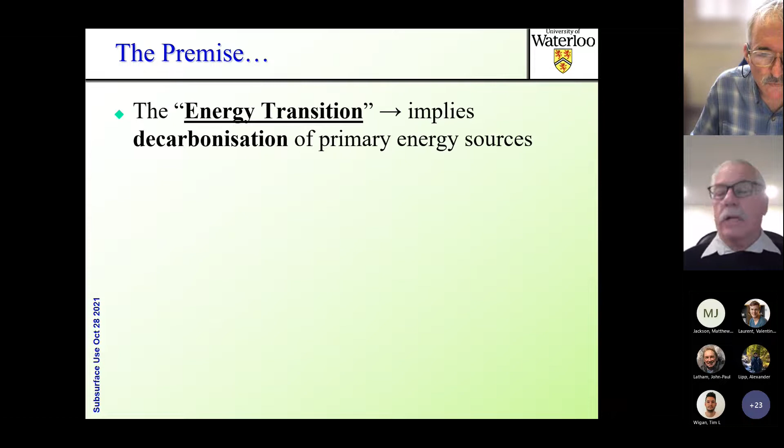In other words, replacing fossil fuels. In other words, not putting new carbon into the atmosphere. And that implies a lot of things, amongst them different transportation fuels, displacement of coal and oil with other things. I list wind and solar and geothermal here. Improvements in efficiency and storage. Certainly here in Canada, with cheap energy, we are energy pigs, and we have a long way to go to make our buildings and our built infrastructure more efficient, maybe even retrofitting our infrastructure to consume less energy in many ways. So I'm going to talk about the subsurface as an aid to the energy transition.

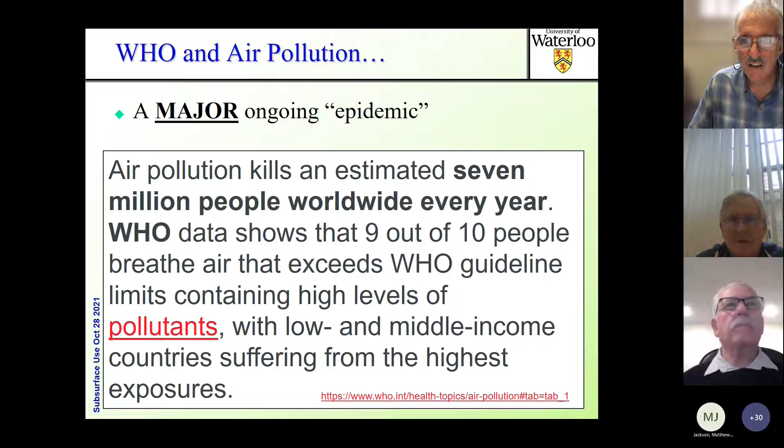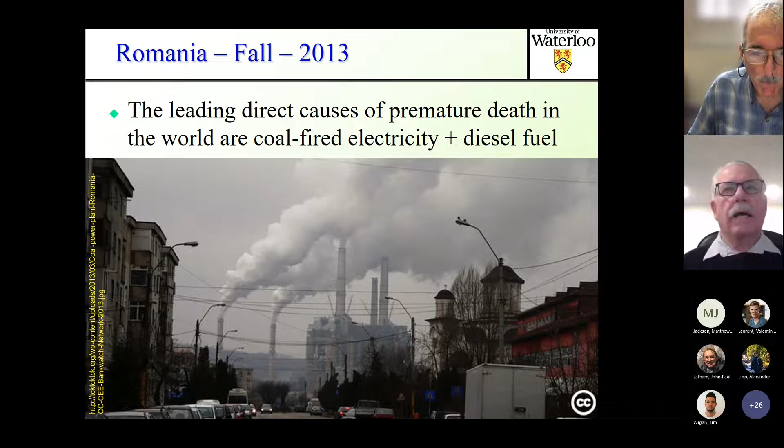And once again, I remind you that it's partially a quality of life issue in many parts of the world. Not so much here in Canada. We're in fairly good shape, but along the east coast of China and India and Mexico City here, these are issues. So the World Health Organization is very clear about this. They have said that air pollution kills an estimated 7 million people because of the pollutants. And of course, naturally, low and middle income countries suffer the worst. Romania, now part of the European Union, has a long history of extreme pollution for their 2-3 major cities, and they're working hard right now to try to abate that level of pollution in their cities.

Okay, so the subsurface and energy transition, I'll try to outline some somewhat different ideas, but in general, we can use the subsurface for natural gas storage. And I remind you that natural gas is a very clean fuel. And many of us, myself included, believe that natural gas could serve as a transition fuel, using natural gas for one generation to build the infrastructure as we move towards a hydrogen economy. Because if we just say no natural gas, when it comes to putting into place a hydrogen economy, then we're just going to have to spend a few trillion extra dollars at that time.

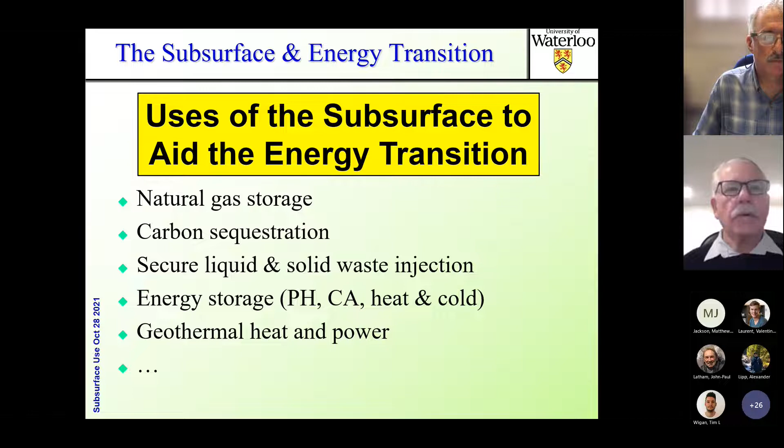Carbon sequestration, secure liquid and solid waste injection, energy storage with pumped hydro, compressed air, storing heat, and also in certain climates, storing cold. And yes, I know in Canada it's a bit bizarre, but I'm actually looking at a technology to store cold in the subsurface for warm climates, evidently. Geothermal heat and power, and other issues. So when we think of the subsurface and energy, we kind of normally think of something like this. This is an array of natural gas wells in Texas.

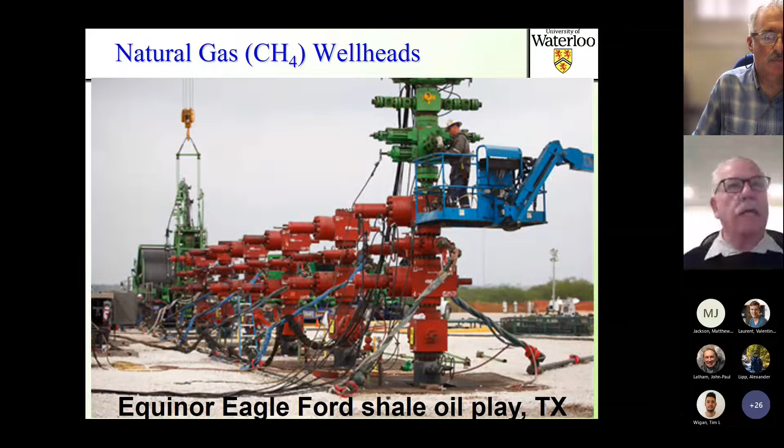Yeah, that's big steel. But we can also use big steel for sequestration and for other purposes to access the subsurface. In general, we're using well bores, not exclusively, but in general.

So I'm going to talk about narrower topics, things that I've been involved in, and one of them is subsurface biosolids injection. And the nice thing about that is that it is a safe and economical treatment method compared to the complex civil engineering treatment facilities that you use in Great Britain and in other places that are economically well developed.

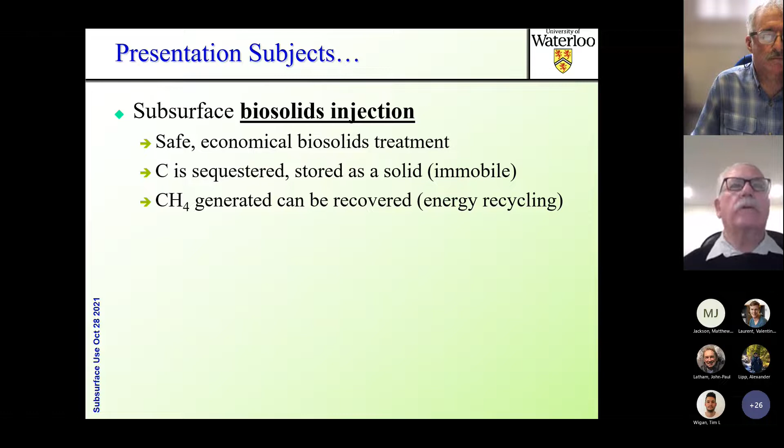The nice thing about putting biosolids in is that you sequester the carbon, the excess carbon, and it also generates methane by the methanogenic archaebacteria that are in the ground everywhere that will degrade the carbohydrates into methane and other gases, leaving behind the carbon as solid material. We're all geoscientists. We know that this is simply the process to make coal. So we can sequester huge amounts of carbon in this manner.

We'll look at enhanced geothermal systems and sedimentary heat. We won't look at high-grade geothermal at all. And I'll finish up by looking at energy storage methods, something that I spent a lot of time on recently, compressed air storage in particular, but also looking at heat storage.

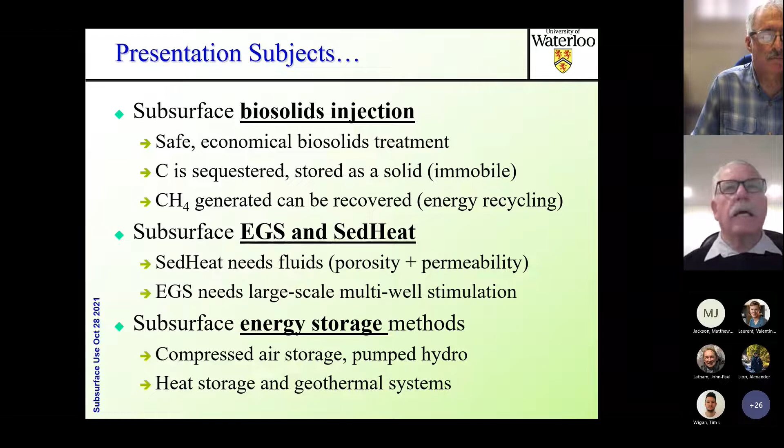Biosolids injection. Essentially, we're looking at the injection of a slurry of wastewater and biosolids. And of course, you and I and everybody produce on average about a half kilogram of dry biosolids every day, which is dominantly organic molecules that have to be treated.

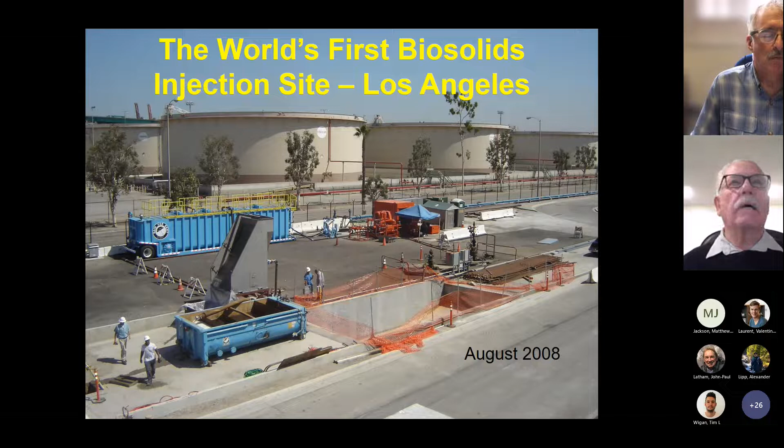So this is the world's first injection facility for biosolids. I was involved in this. I have a patent on this, which expires next year, by the way. And essentially, we are going to slurry some biosolids with wastewater, inject it, anaerobic decomposition takes place. Methane is generated at about 12 to 15% of the dry mass.

There's a wide range depending upon the composition of the biosolids. Carbon dioxide, which is extremely soluble in water, is another byproduct, and the carbon dioxide will enter into solution in the formation water. And that leaves carbon to be permanently sequestered, and a lot of it. At depth, the environmental risks are extremely small. You're not going to have the solid carbon escaping ever.

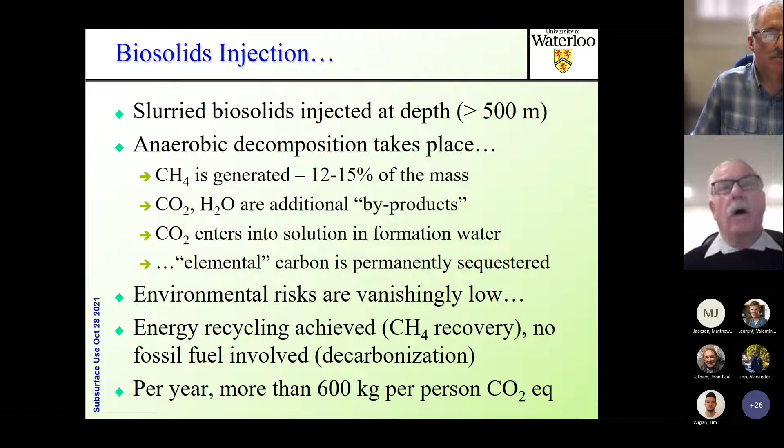And we have some energy recycling. The methane can be recovered. So calculating it out per year, it's more than 600 kilograms per person, carbon dioxide equivalent. Multiply that by large population centers, and you can see that this is not small and it's continual. In other words, we're always sequestering solid carbon permanently.

Conceptually, we have a treatment facility at the surface that accepts the biosolids and slurries it. Injection under hydraulic fracturing conditions, that's necessary. We can't put solid material into the earth without hydraulic fracturing, but we know how to do that. And then, of course, at a later date, methane production.

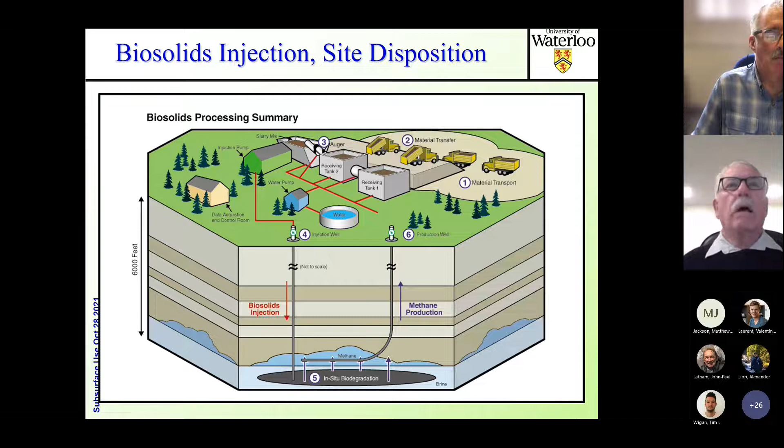We want to be in a place where we have low permeability strata above us for security, good lateral permeability for the leak off of pressures. In other words, high permeability zones above you are good. That causes a leak off, which gives you more security, and a secure wellbore with injection tubing, instrumentation, etc.

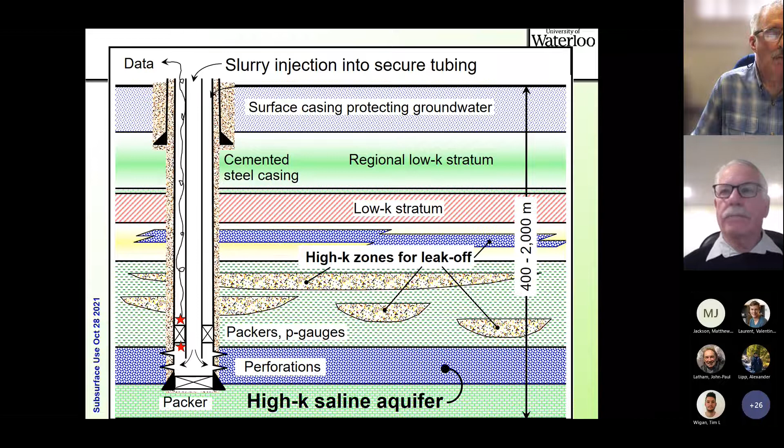In the TIRE project in Los Angeles, the digested sludge is injected into an old oil field at a depth of about 5,000 feet, but a saline aquifer will be just fine. All dangerous agents and human biosolids have a very high concentration of metals. And of course, there's chemicals that you flush down the sink, and there's viruses, and there's other active agents in this biosolids, and these are permanently sequestered safely.

In other words, we get rid of them, and the subsurface will treat them over time. Organic materials will be decomposed by the bacteria, chemicals will be adsorbed by the clay minerals, metals will be sequestered by chemical processes as well. And of course, the carbon sequestration is in solid form, which means it's fully secure, plus methane. And of course, you can co-inject other waste.

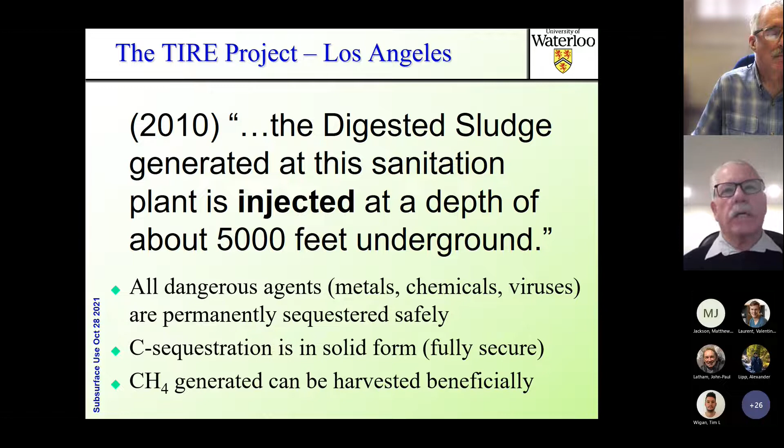And I just show you an example of tank bottom sludges from the oil industry. This is a shot in Saskatchewan, and you can see this sludge is about 30% oil, 20% silica type minerals, and 50% water, and it's extremely expensive to treat. Well, it can be disposed of at depth.

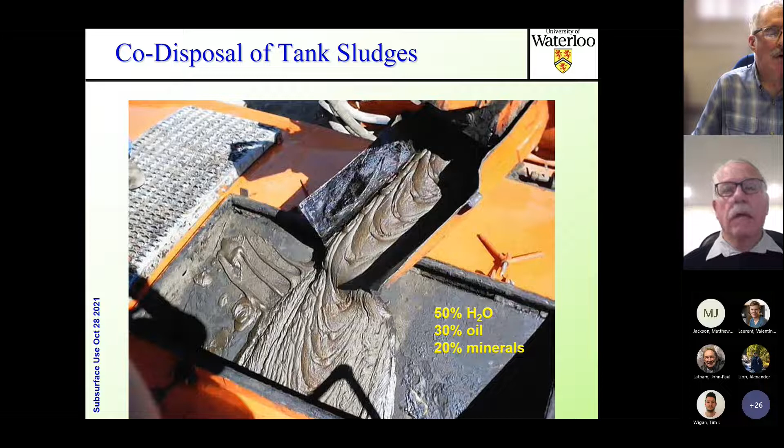To give you an idea of an oil field injection operation, this is one of the larger ones in the world in Indonesia, currently inactive, and sludge is collected from all kinds of facilities, brought to this central facility, slurried and injected.

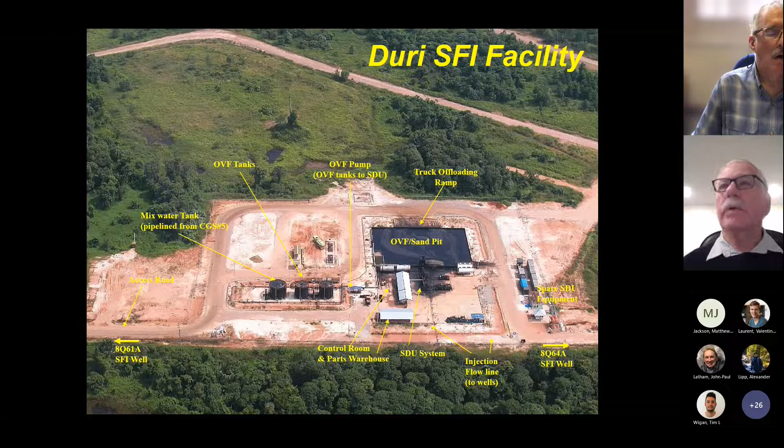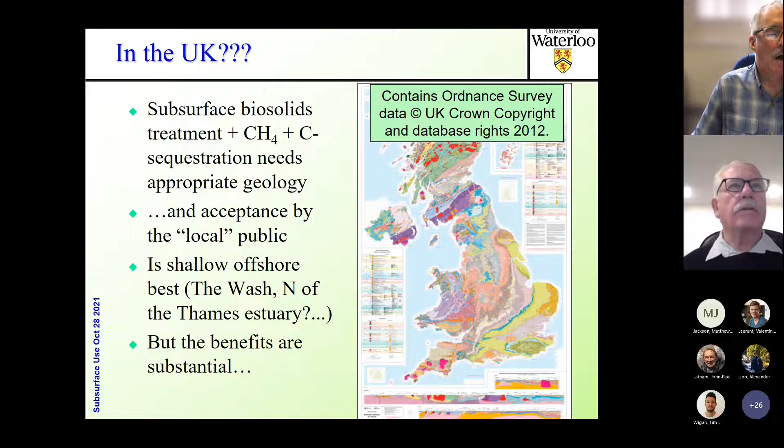In the UK, you have to look at the geology. You have to look at and get the right geology. And just looking at the geology of the UK, the geology in the estuary of the Thames and in the Wash, maybe shallow offshore, seems to be very good, very ductile sediments and appropriate saline aquifers at a moderate depth, 500 to 1,500 meters. Ideal situations for biosolids injection.

There are geomechanics issues to manage. The injection is under conditions of hydraulic parting. Pore pressures in the target formations must dissipate rapidly to avoid regional pressurization. And we have some limits perhaps for a single well, maybe on the order of 50,000, 100,000, 200,000 cubic meters on a solids basis. That's maybe the limit for a single vertical well.

And there will be stress changes. And that means that the initial in situ stresses are going to be altered quite massively. We will be increasing the lateral stresses a great deal. And that's going to change our fracturing behavior. And we want to understand these changes in order to give us a better idea of containment. We want to understand the potential for causing the shearing of bedding planes, especially smectitic clay, weaker bedding planes, which can cause wellbore damage and impair our process.

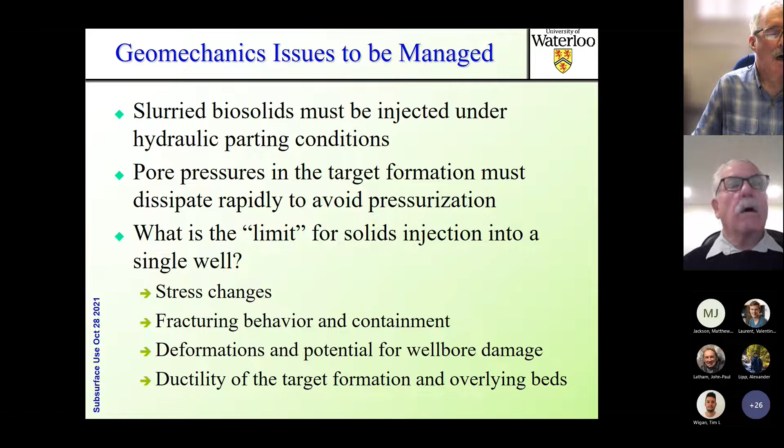We want to look at the ductility of the target formation and the overlying beds to make sure that we are sequestering these materials. But I do point out that after about 18 months to 5 years in situ, the toxic agents have been either digested by the bacteria or have been adsorbed onto clay minerals and are no longer mobile.

The next issue that I've been working on is low-grade geothermal energy, power and heat from the earth, and many of us have been working on that. And I just want to remind you that Canada is cold. So this is a map compiled by Steve Grasby of the Geological Survey of Canada from limited data that is available. But that great big white central part, that's the Canadian Shield, it has a low geothermal gradient. It is one of the poorest places in the world to try to go down and mine heat.

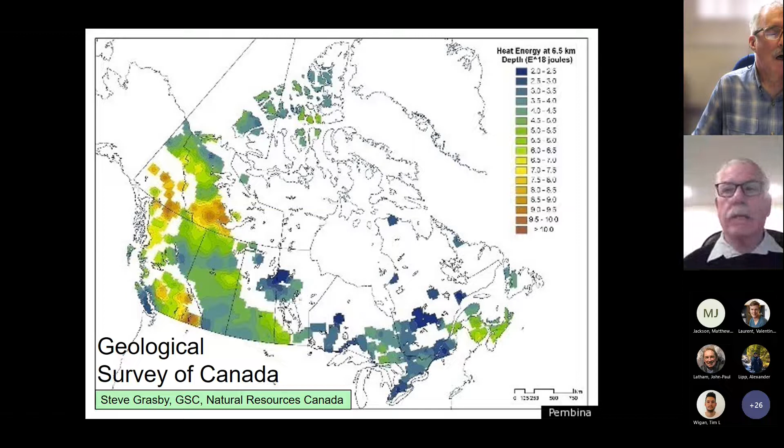On the other hand, we have just a few areas in British Columbia on the far left and maybe into the Yukon that could give us high grade steam, dry steam or wet steam, but we haven't found any reservoirs yet. And then in Alberta and Saskatchewan and on up into the Northwest Territories, we see a sedimentary basin, the Western Canada Sedimentary Basin, which has warm fluids at depth. And by warm, I mean for good saline aquifers, you're going to be in the 110 to maybe 120 degrees Celsius range. So Canada is not only cold at the surface, it's also cold in the subsurface.

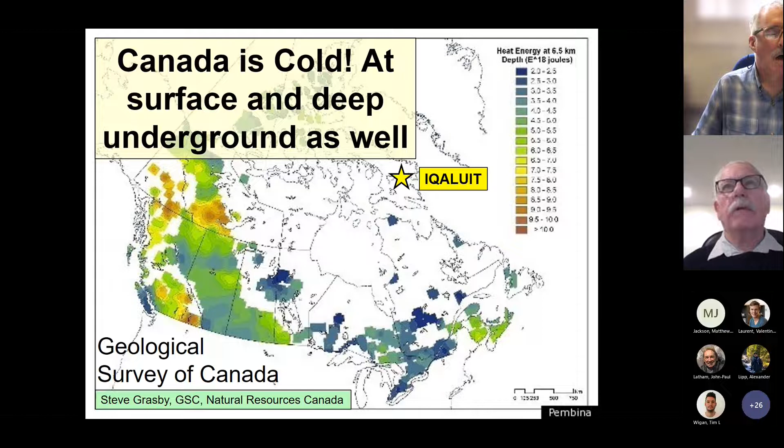And to show you that it's cold in the surface, let's look at this capital city of Nunavut, Iqaluit, just to give you an idea of the climatic conditions. Yes, that's right. A hot day in July is 8 degrees Celsius. Iqaluit makes London look definitely tropical. So that means that we have massive heat requirements in the north and no requirements for air conditioning or cooling. That means that we have some constraints on the use of ground source heat pumps as a means of heating and cooling, because we don't need cooling.

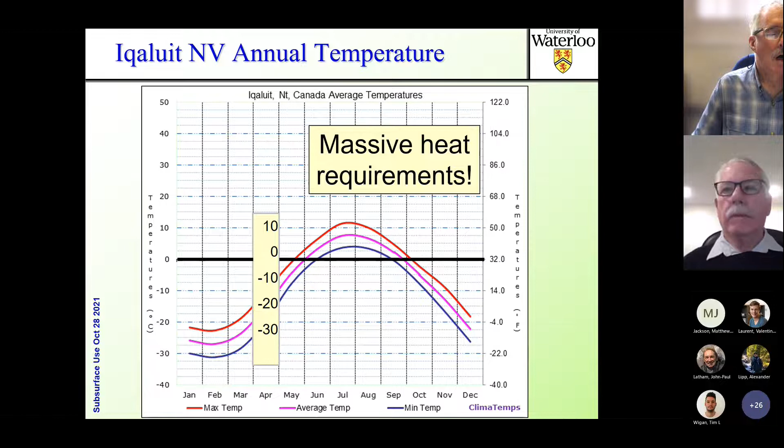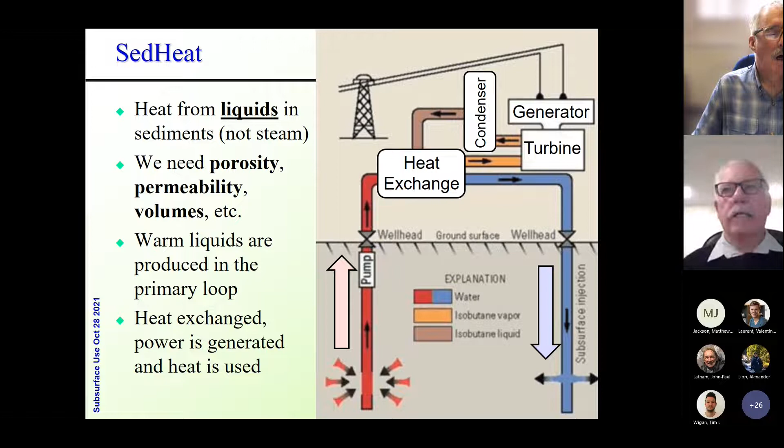And the first commercial project, the DEEP project in Saskatchewan, right on the American border, is on its way to producing commercial power in January. All of the holes have been drilled, and the surface facilities are being built and finalized as we speak. They have already received permission to increase their project from 5 megawatts to 20 megawatts right away, and they are looking at the prospects for other power generation plants in the subsurface.

Now you notice I'm saying power, electrical energy. Why electrical energy and why not heat? Well, heat cannot be shipped 500 kilometers.

So electrical energy is very, very dispatchable, very shippable, very good to send out to remote areas that need it, whereas heat has to be used locally. Even though we want to mine the heat and use it for domiciles in Canada, that's a local issue.

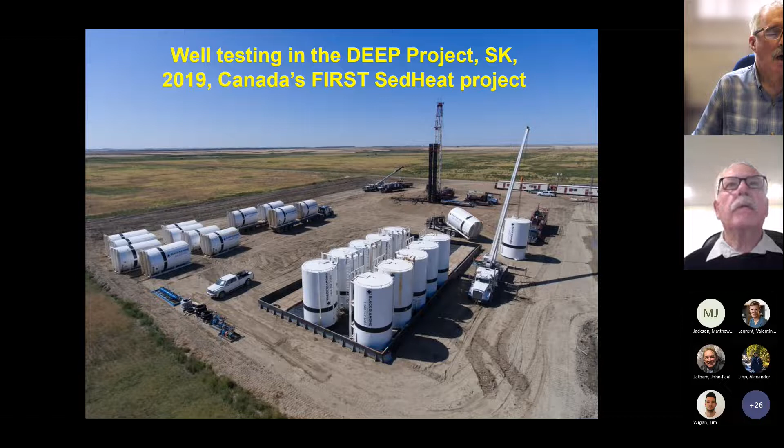This project is 3.2 kilometers deep, about 115 degrees Celsius. And to give you an idea of the requirements, to generate 5 megawatts continuous power requires about 210 liters per second of 115 degrees Celsius brine. Furthermore, the brine that comes out is not at ambient, it's at 65 degrees Celsius. So there's still a lot of sensible heat that could be extracted from that fluid.

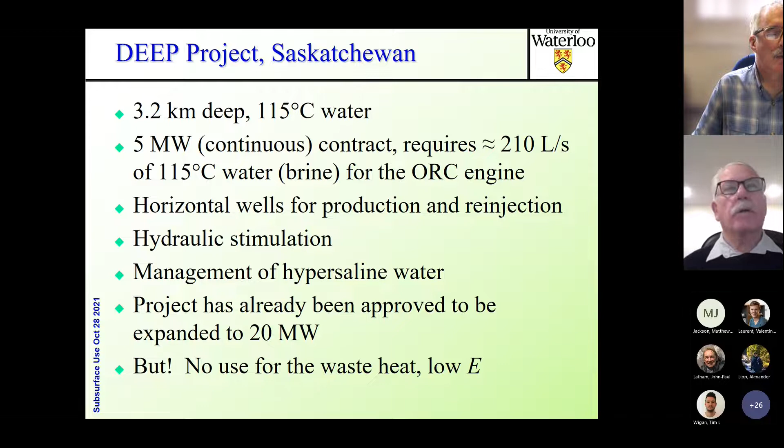But you saw the picture, that's out there in the prairies. There is no use for the heat at the present time. That's unfortunate. That means that the warm water is just going to be recirculated and there will be attendant losses.

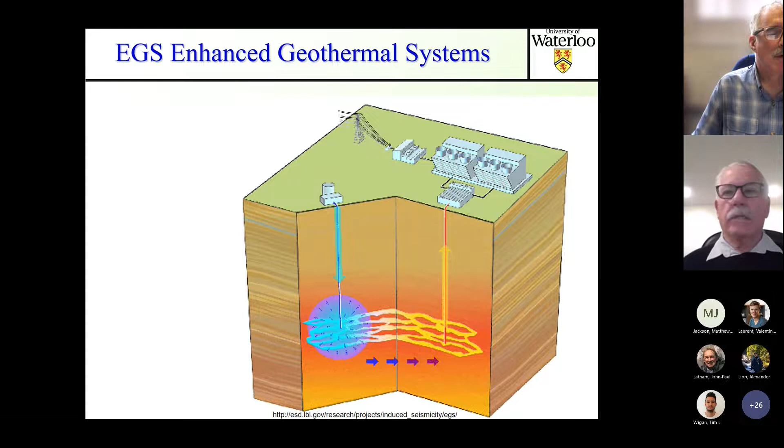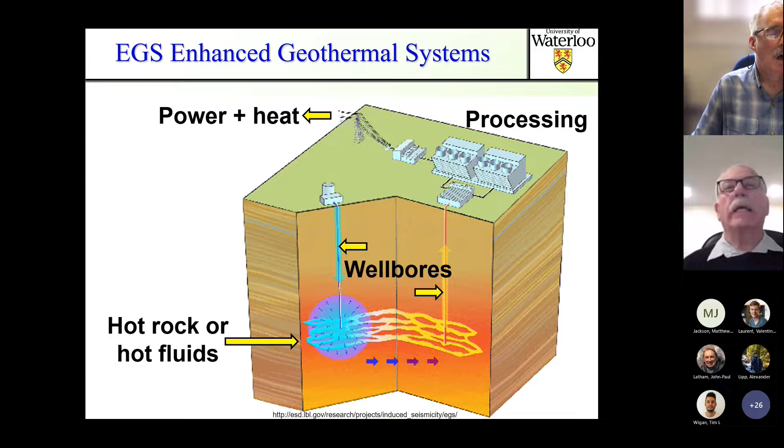Now, if we don't have permeability and porosity, the idea for an enhanced geothermal system is to identify a zone of hot rocks or hot fluids or warm rocks, access that zone with well bores, bring the heat up to a processing plant, and use the power and heat as best you can. In general, we believe that these systems are not sufficiently permeable at the beginning and will have to be hydraulically stimulated to generate the interwell connectivity required to successfully mine the heat at a commercial level.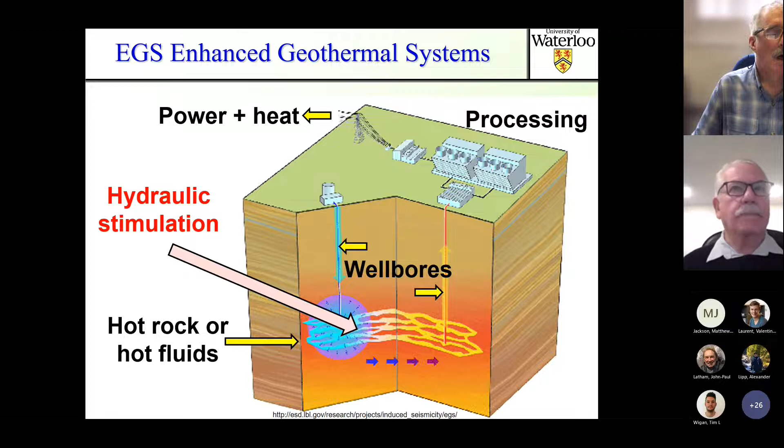Probably at least 100 degrees Celsius rock is going to be needed, preferably more, of course, but more means deeper, deeper means drilling expenses. So we need a method to get the heat from the rock, to bring it to the surface, and to use the thermal energy effectively. And I keep on emphasizing heat. In Canada, we have need for the heat.

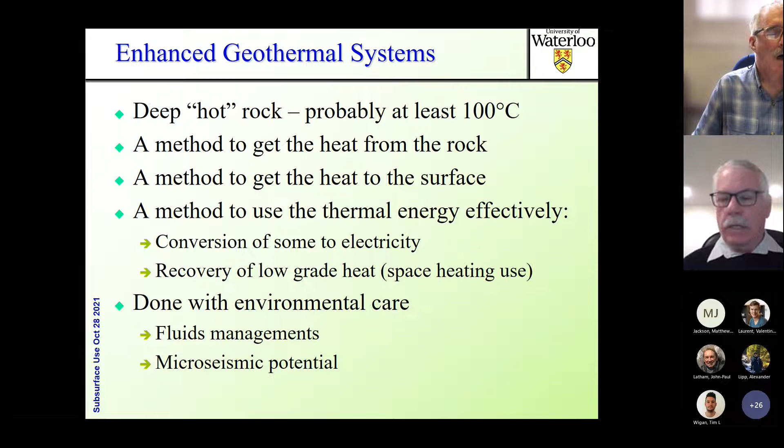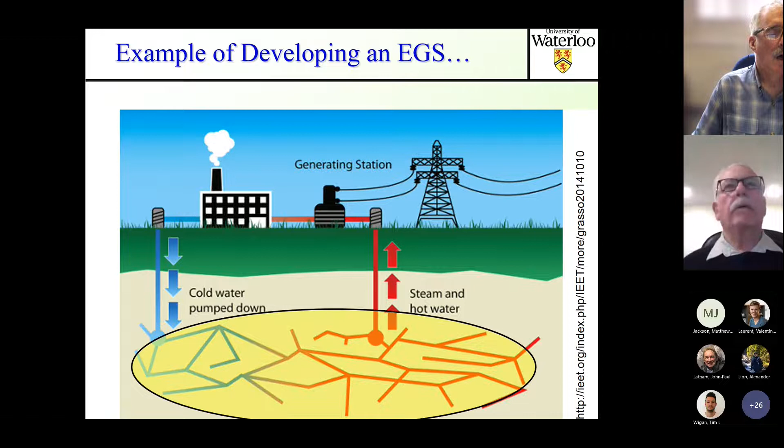The two big issues environmentally are fluids management and the potential for microseismic emissions, or shall we say small earthquakes, as a result of the thermally induced strains in the rock mass, combined with the higher pore pressures that might be used to drive the injection process. So once again, to develop it, we have to create a permeable environment. We have to circulate the fluids through this hydraulically stimulated zone and bring them to the surface.

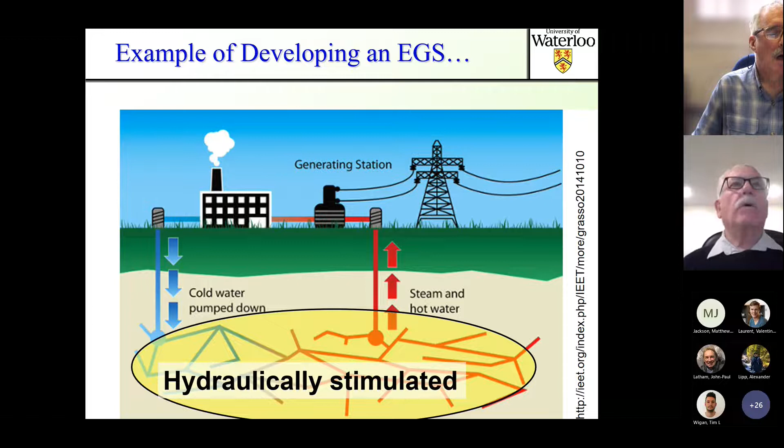So hydraulic stimulation, a primary loop. Remember that as we put in fluids into the rock mass, the fluids come back up mineralized, unless we're using carbon dioxide, something that many people are looking at. That means that we have two different isolated loops, and we have to have a heat exchanger to scavenge the heat from the primary loop to use in the organic Rankine cycle engine.

However, don't get fixed on an organic Rankine engine. We and others are developing new ideas, such as combining compressed air energy storage with geothermal heat for power, even cooling. If you give me compressed air and low-grade geothermal heat, I can generate power, but I can also give you the output air at about 2 or 3 degrees Celsius, and that would be wonderful for places like Mumbai or Nairobi to provide cool in a hot climate.

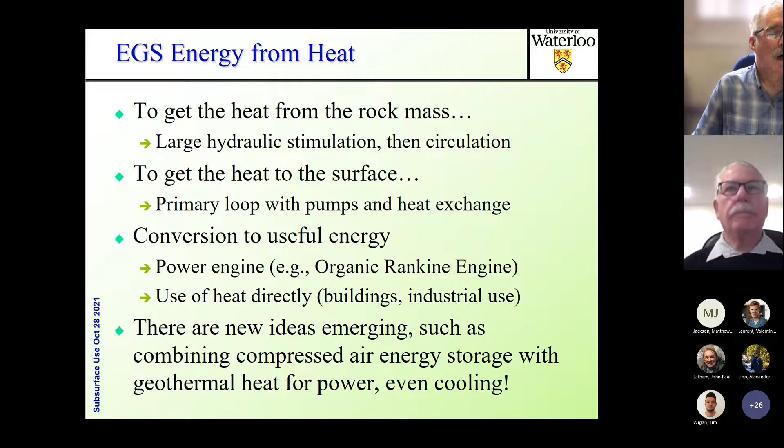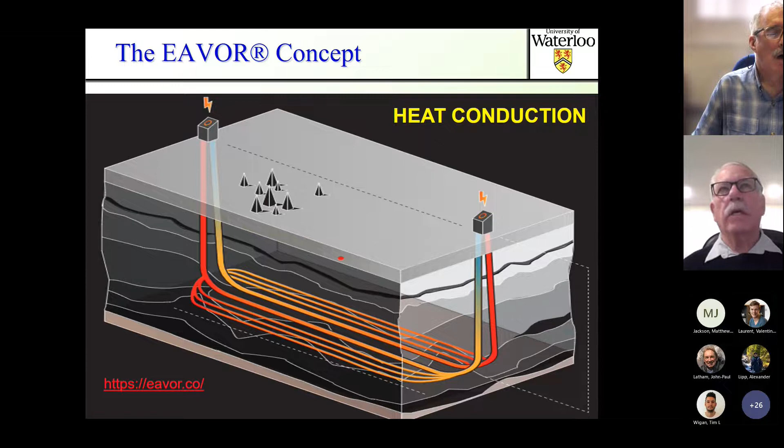Another way that is being examined is heat conduction. So this is the EAVOR concept. The website is listed there, and it's conduction in the rock mass, not convective exploitation by injecting a fluid into the rock mass. The fluid is circulated through sealed wellbores, either cased or sealed in another way. And full-scale field trials are ongoing in central Alberta.

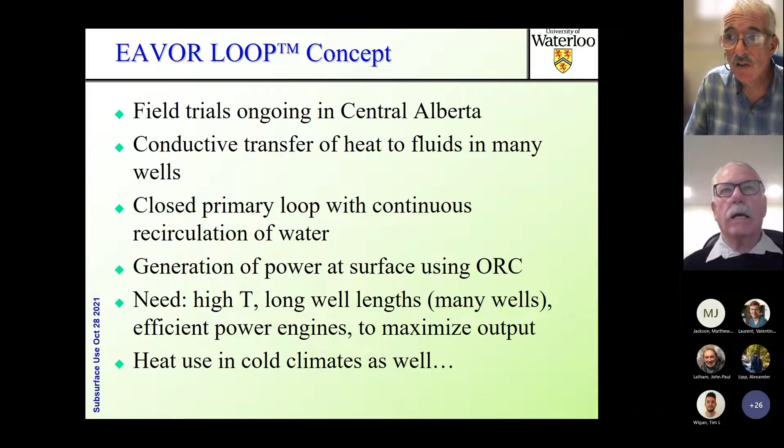And remember that conduction is slow. You're going to need a lot of wells, preferably a high temperature. You're going to need efficient power engines. And again, I want to remind you that the organic Rankine cycle is not particularly efficient. Even with the delta T that you can use, it still will only extract about 15, maybe a little bit more, % of that energy as electrical energy. There's a huge amount of waste heat in the organic Rankine cycle system. But again, my final point, in cold climates, that heat has significant value.

But we all know that drilling costs increase exponentially while the heat in the rock increases linearly. So that means there are very severe limits to the commercialization of EGS with depth. This idea of, hey, let's drill down 15 kilometers. I'd like to remind you that the deepest hole we've ever drilled in the world is somewhat over 12 kilometers, and that took many years to drill in the Kola Peninsula in Russia.

So the Finland project is looking for heat exclusively. They want to heat a subdivision exclusively, and they claim that they will be able to mine about 35 megawatts of heat at the maximum output of the system. Of course, in the summer, you're not going to be using this very much, but in the winter, in the coldest months, you need that heat. So 35 megawatts is their claim.

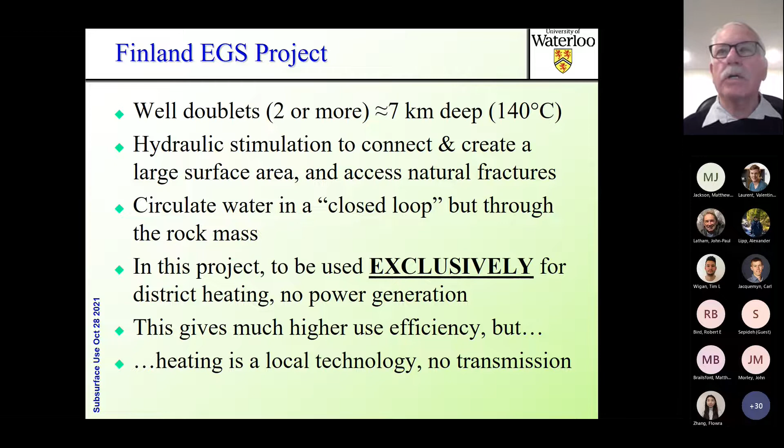Remember that if you do use geothermal for heat only, it's much more efficient than trying to generate power, but it's a local technology. No transmission is reasonably viable. I mentioned the binary cycle. I just want to emphasize that we stimulate a region, we work through a primary loop, and there's a lot of people that are looking at different technologies for this binary cycle power plant to try to extract more power from it. But we are, of course, limited by the laws of thermodynamics.

And Monsieur Carnot, who was a professor at École Polytechnique, I believe, back about 200 years ago, he kind of laid down the big lines for the efficiency. Most of you know about the Carnot cycle, which tells us how much power we can get out.

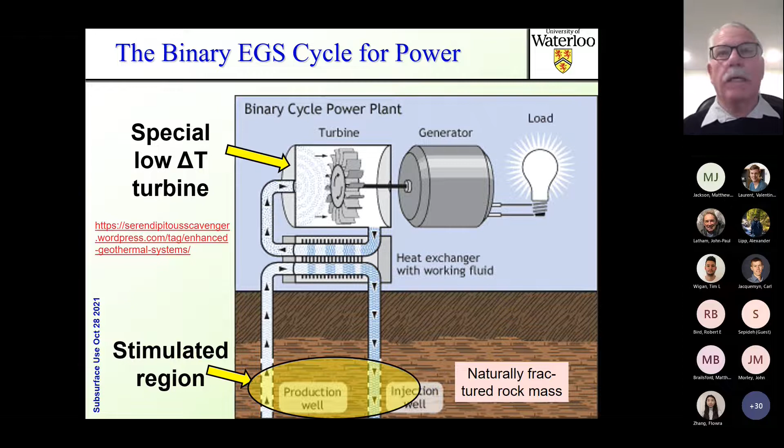Probably we can recirculate the cooled fluids through the rock mass, so we don't have to worry about disposing of fluids. But remember that as we cool the rock, we're going to have shrinkage. That's going to open up more natural fractures, and we're going to get a process called short-circuiting, thermal short-circuiting. We've published a couple of papers on that here in this last year. You can access them if you wish. The primary author is Bruce Gee, Rob Gracie, and myself.

And also generating microseismic activity, because if we're cooling a zone, we're going to be dropping the stresses in that zone. Those stresses will be transferred to the shoulders, and we're going to have very large stress gradients, which will, of course, trigger shearing of the natural fractures.

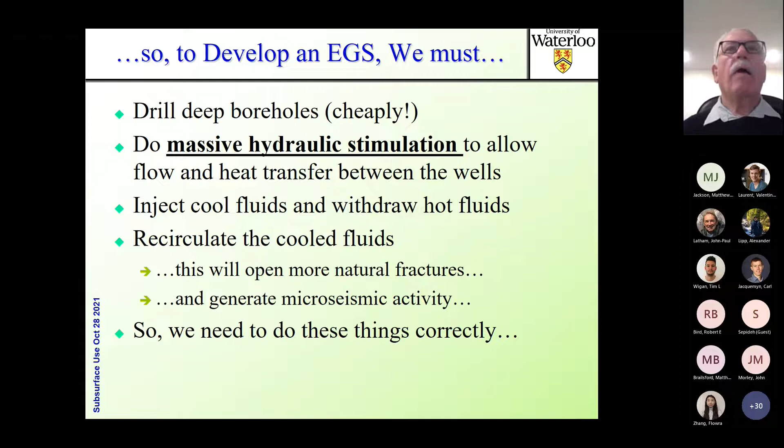And just to show you natural fractures, about 3 years ago, I had an opportunity to go down to Tasmania. I recommend it to each of you, and have a look at some natural fractures along the beach there with a friend of mine who's also a geotechnical person. Yep. Now down below, they don't quite look like that.

But one thing that we do know is that we're going to get channeling or short-circuiting because of a process of shrinkage and focusing of the flow in certain regions. So that one fracture will become the primary pathway, and then that means we have more difficulty in mining heat from surrounding zones.

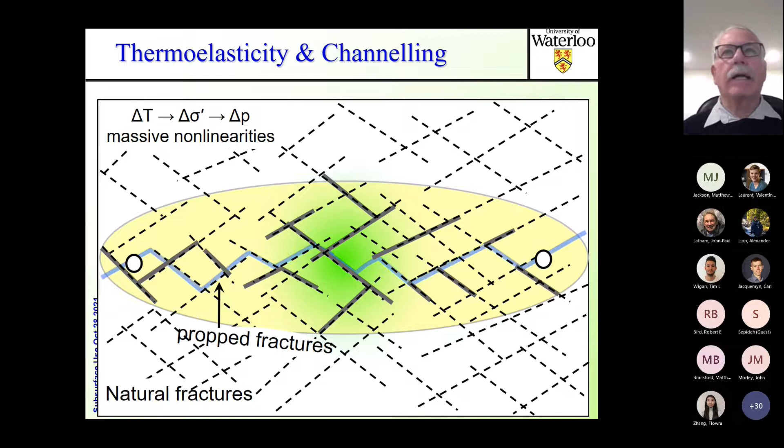Okay, now this is a very, very non-linear process, and that makes the mathematical modelers maybe happy, but also challenged. So when we write down the governing equations and start looking at the parameters, what some people call constants, we start to realize that in geothermal, nothing is constant. Our moduli are changing, at least at the scale of the rock mass. We're changing the permeabilities. Well, I don't think we're changing beta so much. That's the coefficient of thermal expansion, but still, things are changing all the way. We're even changing porosity by the dilation of the apertures in natural rock masses.

So everything is nonlinear, even the viscosity. If we're using water, at the beginning, we're going to have high temperatures. At the end, we're going to have much lower temperatures during our heat mining. The viscosity will change by a factor of 2 or 3. That will change our parasitic losses.

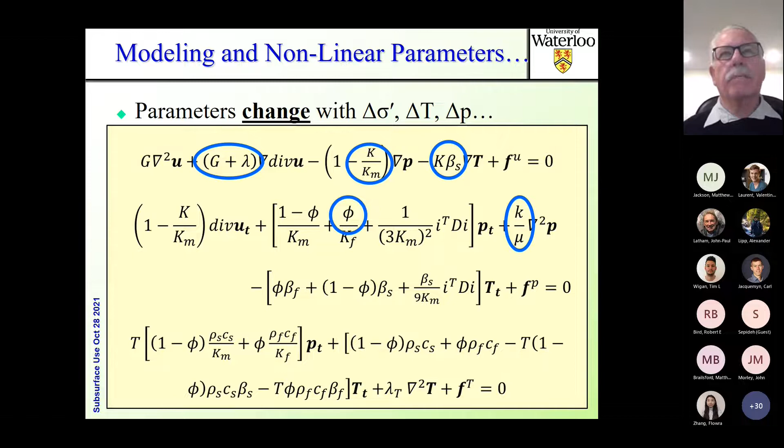Okay, so we need better predictive models because people that invest money into geothermal projects don't like uncertainty. For steam projects, we know how to de-risk them financially. But for enhanced geothermal systems, we're not there yet. We need better models to allow better predictions. We need improvements in hydraulic stimulation to link well bores that might be 400 or 500 meters apart.

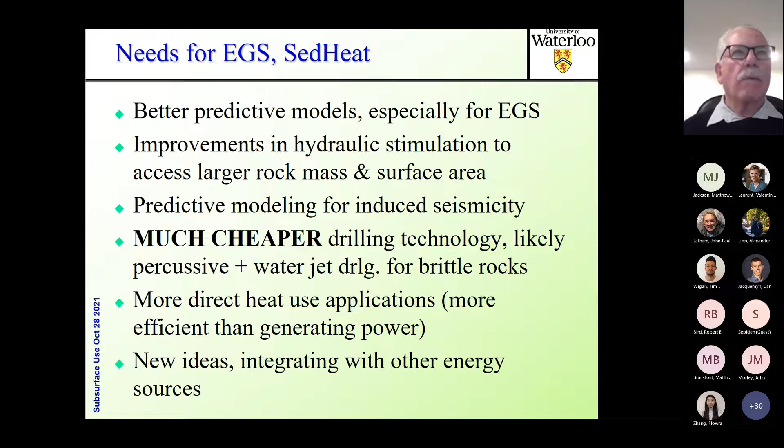We need predictive models for induced seismicity. They don't exist yet. We have to marry rock mechanics with geophysics to come up with this type of predictive modeling. We have to have cheaper drilling. We have to learn how to use heat more efficiently. And it's not an easy road. You might ironically call it a rocky road ahead of us for EGS.

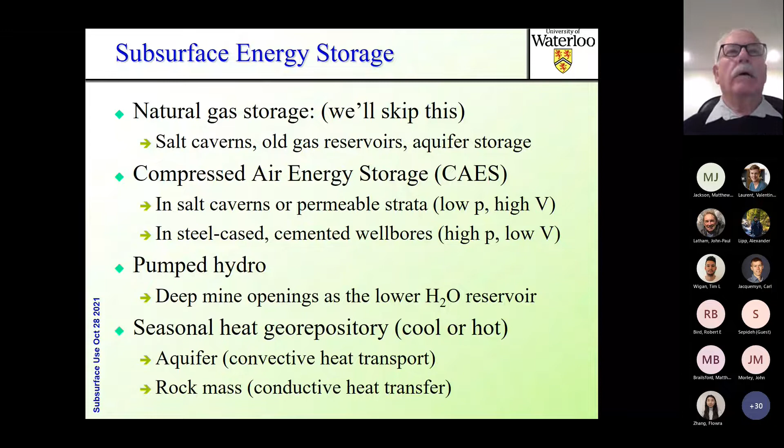So let's move on to compressed air, pumped hydro, and heat storage in the subsurface. This kind of evolves in part out of the natural gas storage industry, which is very mature. And I'll skip this slide to move on to why storage. Well, as we move more and more towards variable energy, the short-term energy variability that we see with wind and solar, we need to try to manage that. We also want to decarbonize, so we want more of that energy, and we have to store it.

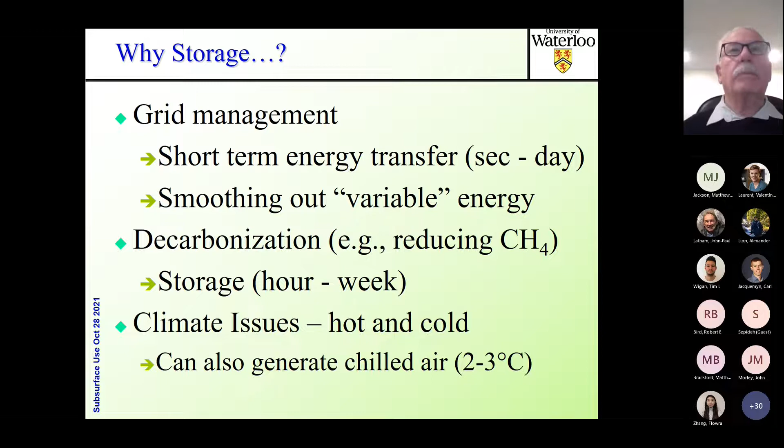Storage might mean on a very short-term basis, hours, even minutes, but it also might mean storage for a longer-term basis, such as a week. But I remind you, you can't store heat or compressed air for a year. This is not natural gas. The energy density is very low. So you have to use your battery, if you wish to call it that, on a very regular basis to extract value from it. So wind, intermittent, but the costs are dropping.

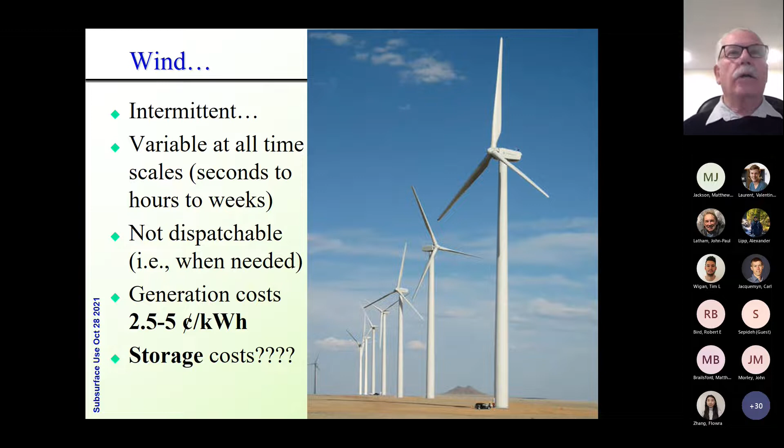Sun, it's also intermittent, and it's intermittent on a yearly basis. So here's what I downloaded for London in the UK, and that orangey color there, I'm a bit colorblind, I think it's orangey. That's the statistical variability at the 95% or 99% limits for each summer. Look at how variable the solar energy is in London from year to year. It's that orange line. How do you design an energy storage system to work well with a grid if you're using solar power? Well, maybe solar power isn't what the UK needs.

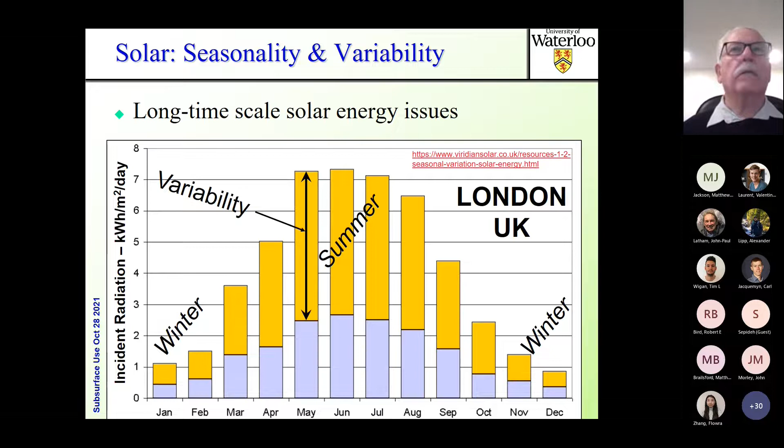Maybe the UK has to focus on wind power, and indeed you're doing that with your huge offshore wind farms that you are now building on the Dogger Bank and of course in Scotland and other places. So energy storage is to change the time of use, but also to smooth it, and to provide other ancillary grid services, such as what we call load following capability, to provide inertia. Lithium-ion batteries don't provide inertia for the grid, whereas spinning equipment like compressed air energy turbines do provide what we call inertia for the grid to stabilize the grid.

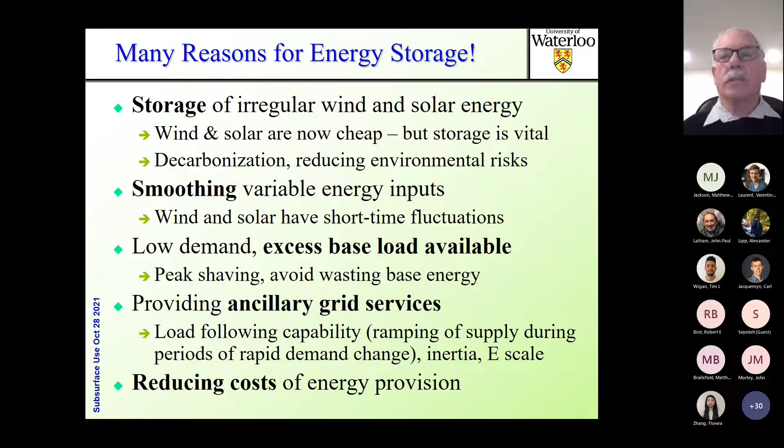Okay, safety and reduction of costs of energy provision. I do not believe that Tesla's Megapack batteries are the final answer. I think that we're going to have to look much, much more at subsurface storage. Batteries have their problems. Pumped hydro, well, nobody wants to flood nice valleys anymore. So pumped hydro means maybe using old mine shafts. That's certainly possible, but there are severe limitations, especially in arid climates. Pumped hydro is simply not possible. Now in Norway, of course, with the mountains right by the seacoast and with all kinds of freshwater rivers coming down, Norway can use pumped hydro very, very effectively.

Down in Kent or around London, no, it's not going to happen. In Saskatchewan, no, it's not going to happen. So in some cases, yes. Compressed air storage, it's great, and it's got a long history already, but it is lower efficiency in conversion. Whereas 95% conversion efficiency is possible for batteries, well, actually 98%, and pumped hydro is more than 85%, maybe 88, 90. Compressed air storage runs between 50 and 70, depending if you are scavenging the heat and reusing it to

heat the air. Hydrogen, we're not ready for that yet. We need another 20, 30 years before we're going to have a significant amount of hydrogen in our energy economy. And I don't see any magic bullets out there. I do not believe that modular nuclear reactors are going to live up to the incredible hype and the incredible claims that their proponents are publishing these days. There are many problems that are not solved, including, let's see, what community will accept modular reactors in their backyard? The NIMBY issue is always going to be with us.

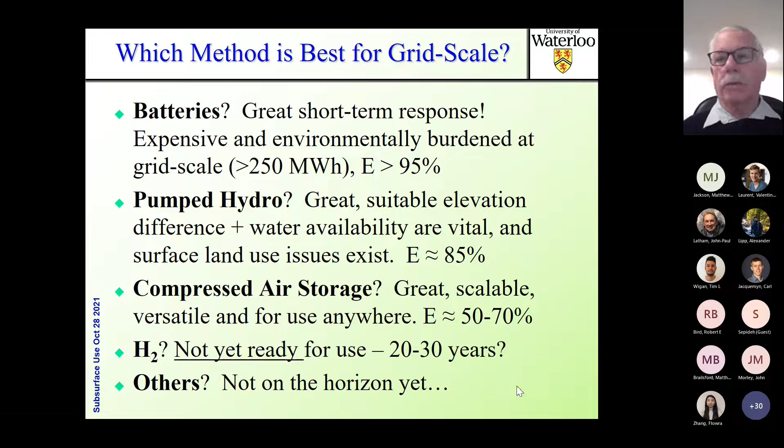And of course, danger. This is a battery fire on August the 21st in Geelong battery farm in Australia, which shut things down for quite a while. And there have been other lithium battery fires. So I don't like batteries personally, but then batteries sit on the surface. And as you know, I'm a subsurface person. So I favor anything that's at least 100 meters deep.

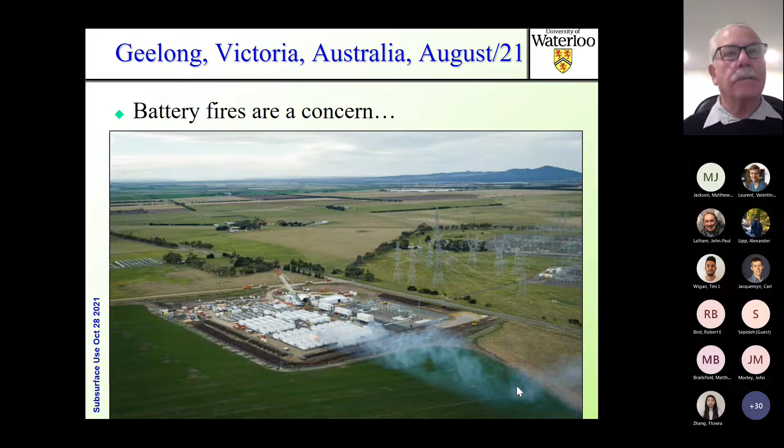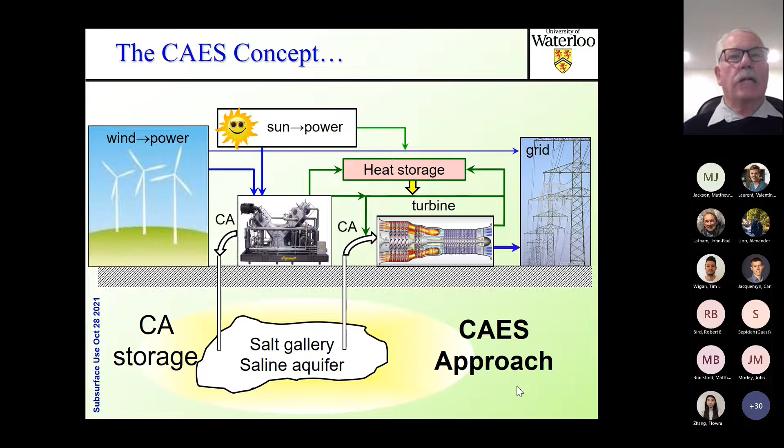The compressed air energy storage concept is fairly straightforward. You take power, excess grid power as well, for that matter. Compress air, if you can, store the heat from the compression, because the heat is going to help you by heating the air going into turbines to keep the air from freezing and extracting the energy. Your storage medium can be, in this case, a salt cavern, which is actually a void, a compressed air filled void at depth, or we can use a saline aquifer.

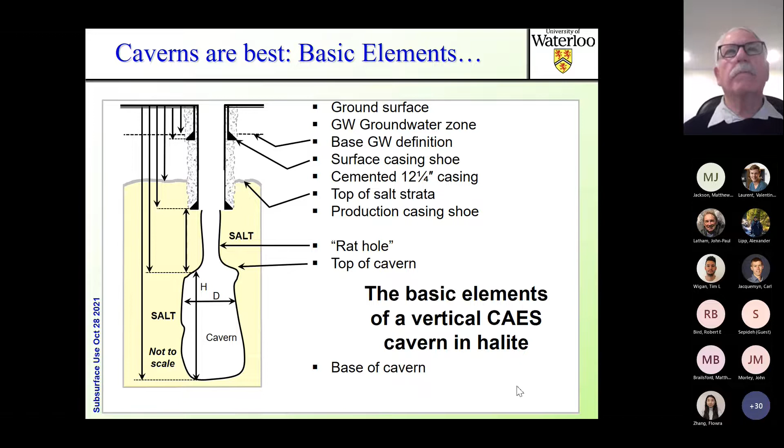Salt caverns, we know how to design them. We've been designing them and using them for natural gas storage for more than a generation. There are two operating compressed air large-scale grid projects in the world. One in Germany, in Huntorf, has been operating for over 40 years, and the salt cavern is absolutely performing perfectly. And by the way, batteries last 7 or 8 years. Salt caverns, indefinite. The other grid scale facility is in McIntosh in Alabama in the United States. Both of them happen to be associated with a nuclear power plant.

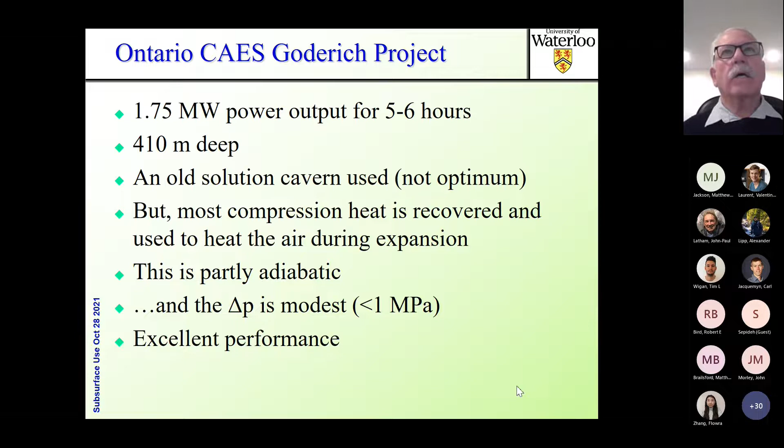The third project that is commercial now is a very small demonstration project, and it's the first one that's adiabatic, mostly adiabatic. In other words, they are storing the heat in oil and using the heat to heat the air going into the expanders. It's very modest delta P, only about 600, 700 kPa, but excellent performance so far at 1.75 megawatts output. And it's a demonstration project. Ontario has excellent conditions for scaling up to grid scale.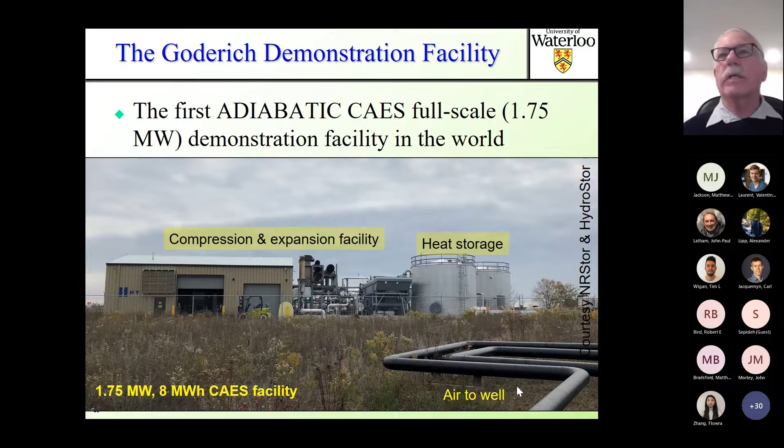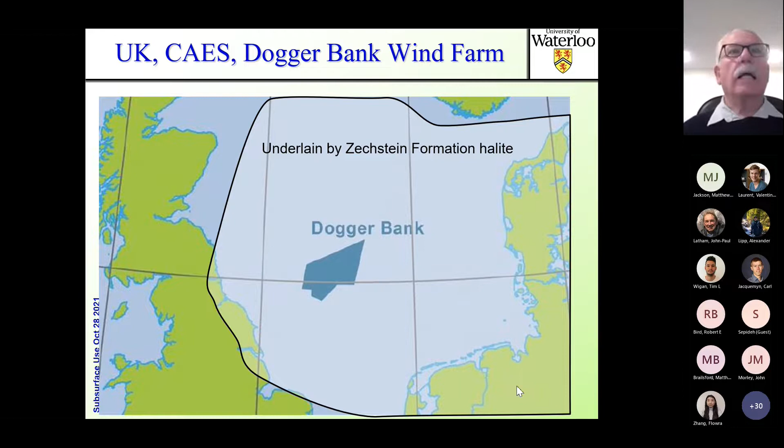All right, so that's Dogger Bank in the middle of the North Sea there. And it's underlain by the Zechstein Formation halite, which of course intersects in Newcastle, and you have potash mines up in that little corner of England. And that also means you have good salt for storage of the variable component of the wind power to smooth it out and help the whole process of integrating more wind power into the grid. We can do that, but you need the storage.

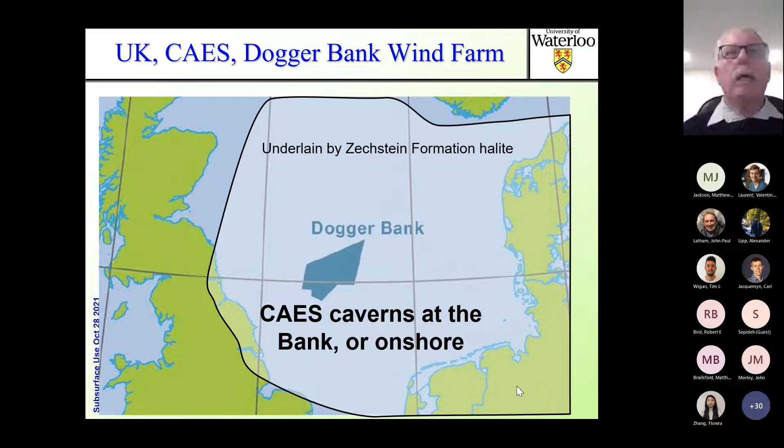And I mean large grid scale storage at the gigawatt scale. And the storage of 10 gigawatt hours, 20 gigawatt hours, that's the scale that you need in the United Kingdom to factor the Dogger Bank in effectively. I don't know how much storage is being planned, but trust me, more is better. However, we can use cased well bores for compressed air storage as well.

So a cased well bore that is a kilometer deep, 30 centimeters diameter, is about 71, 72 cubic meters. And if you compress that up to 40 or 30 megapascals, you've got about 5 to 10 megawatt hours of energy storage in the cased well. And again, we can use that indefinitely. And it's not constrained by geology in this case.

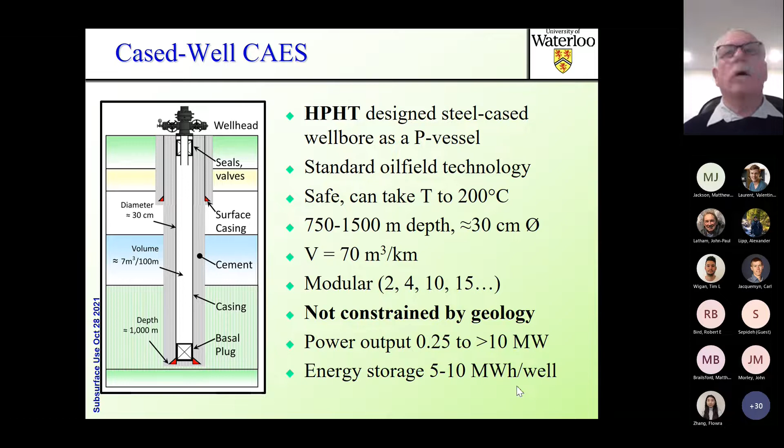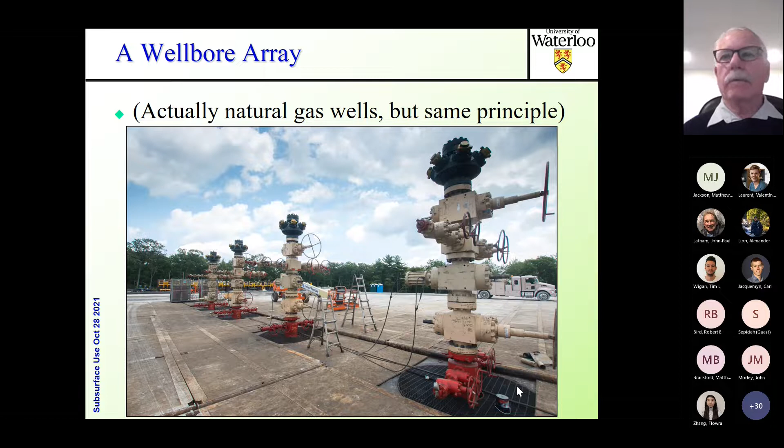And if you want 2 of them or 10 of them or 20 of them, then you can build an array of wells. And this is not a compressed air well. These are, again, natural gas wells. And the project that we're working on in Australia, in its early days, we don't have the money yet, but we're planning on putting these wellheads actually under the ground. So it'll be very visually okay. I'm going to skip a few slides here.

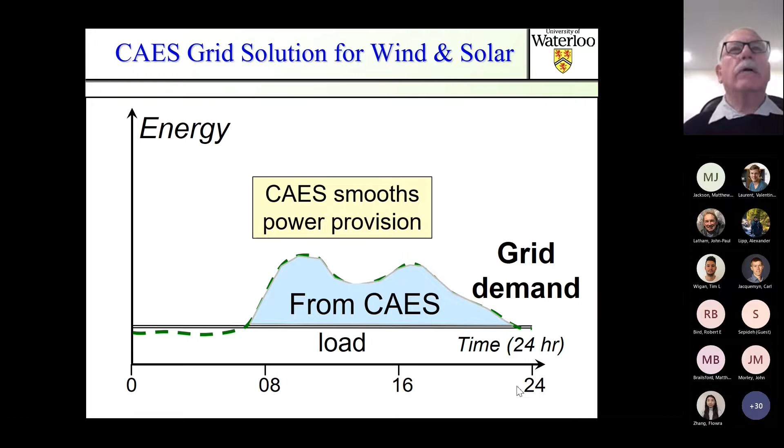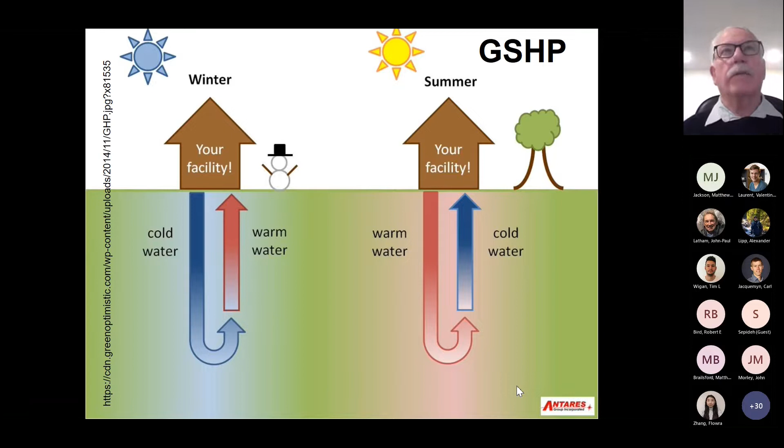I just want to mention that a ground source heat pump is great in Toronto, where you need cooling in the summer and heating in the winter. But in the northern climates, all you want is heating. So you cannot extract heat indefinitely from the subsurface. The same thing in a tropical or a very hot climate. You need cool, not heat. So you can't continue to cool down the subsurface by extracting cool from it indefinitely. You'll end up freezing everything up, and your efficiency will completely drop. So let's just skip that.

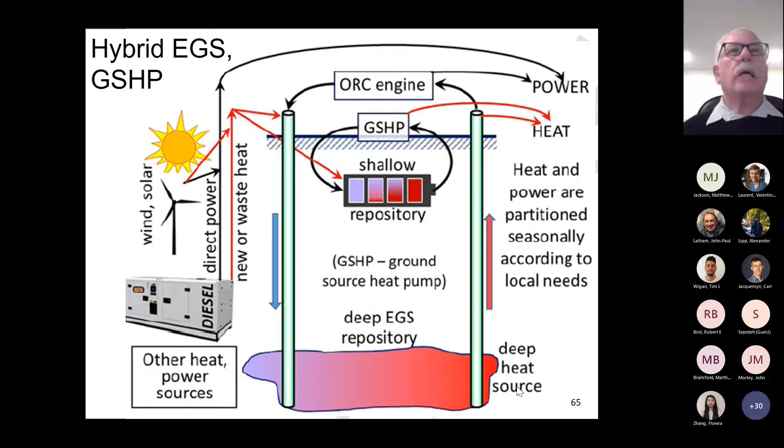We're working on multi-dimensional aspects of shallow plus deep heat repositories and storage. Pumped hydro, underground mines. This is a concept that is being looked at around the world. I don't think there is a large-scale active project yet. We know how to do it. We have an underground pump house, an upper reservoir, and the lower reservoir in the mine. And when we have excess energy, we pump water up to the upper reservoir. When we want the energy, we pass it through the water turbines in the pump house and generate energy.

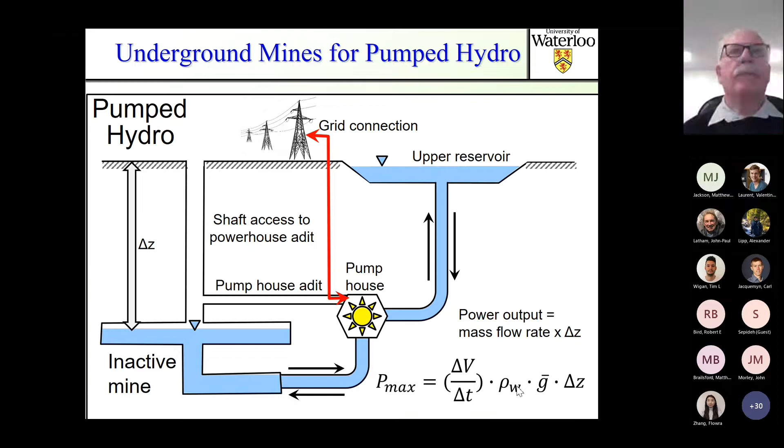There is a project being studied in Ontario here, and they're talking 1,000 megawatts maximum power output. And it's on the highlands along the Niagara Escarpment. And they have agreed to put the powerhouse and everything underground. So there's a huge amount of geomechanics and applied geology here that we're going to have to go through. I'm working on the stresses, actually.

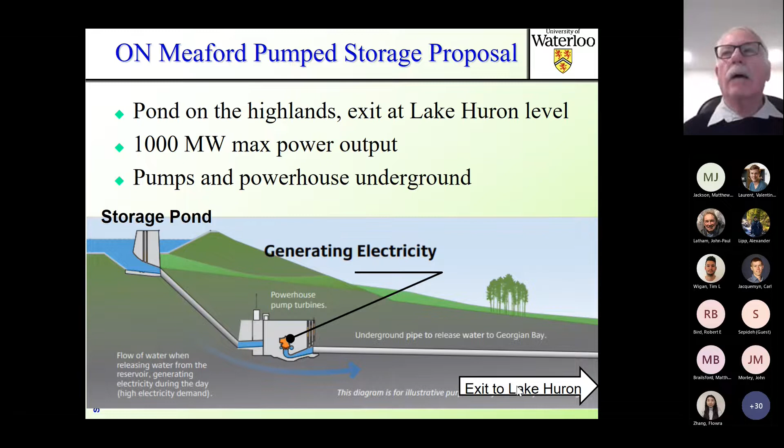All right, so just to summarize, in subsurface storage issues, we need to understand the surface impacts, underground stability, thermal issues, again, microseismic concerns in some domains, the integration of these systems with the grid, and so on. But this is a really, really rich area to work in for geoscientists and others. I've summarized 3 ideas here, and I'll just briefly summarize them again.

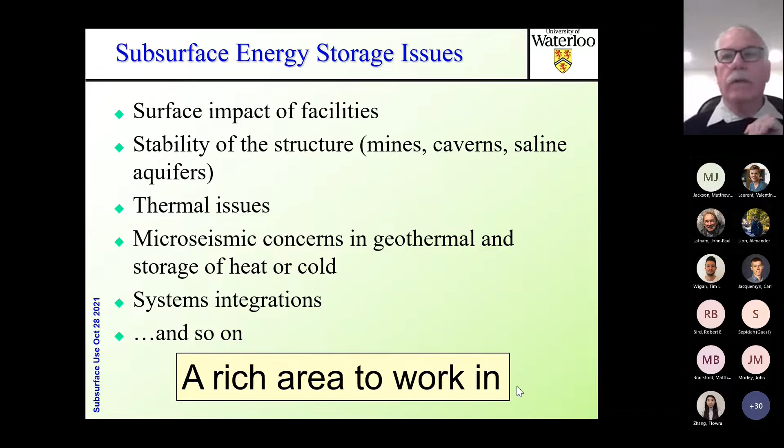As we are moving to a carbon light world, we have to find better ways to generate, store, and use energy. And we can't solve one problem, say generation, without solving the others, the storage problem to smooth out the deliverability and the transmission and use of that energy. And of course, you're always thinking electrical power, but no, it's not just electrical power. It could be heat. It could be cold.

Another little point I just want to leave with you is that in a very cold climate, heat engines at the surface, the organic Rankine cycle, are actually substantially more efficient, because you're moving to lower temperatures on the Rankine scale, or kelvins. You're moving down the Kelvin scale towards the left, and it gets more efficient. We want to use a subsurface not only for these things that I've mentioned, but also for disposal of wastes, liquid and solid wastes.

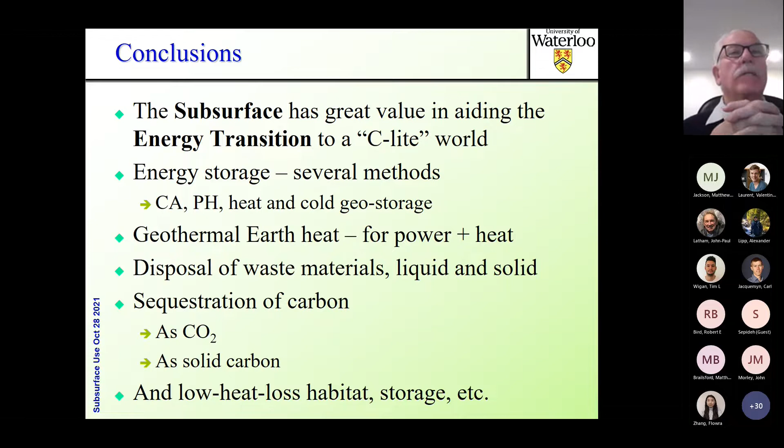We store huge amounts of, or we dispose of huge amounts of waste materials in sedimentary basins, like produced water and acid gases. Sequestration of carbon, we're all interested in that. And maybe even looking at the underground more and more as a low heat loss habitat and storage, etc.